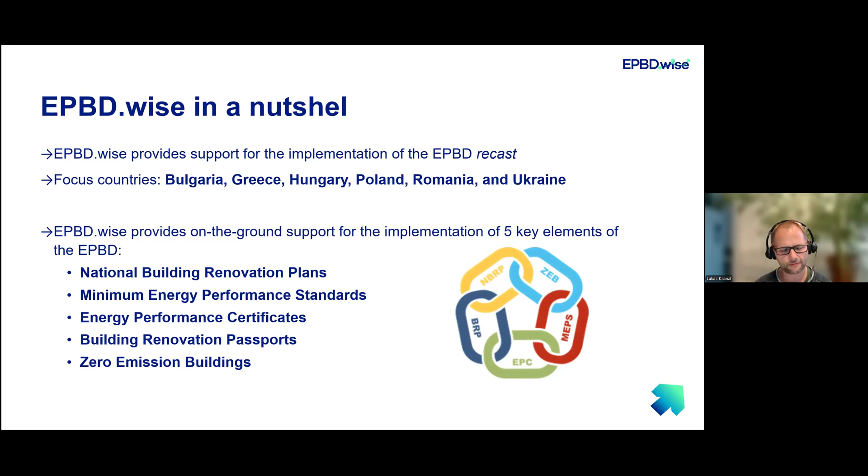And we deep dive into 5 key elements of the EPBD, which either were introduced as new elements in the revised EPBD or which changed their ambition level, their meaning, the way they interact with other policy elements. And these 5 elements are national building renovation plans, minimum energy performance standards and national trajectories for progressive renovation, energy performance certificates, building renovation passports, and zero-emission buildings.

And they are obviously all linked to each other. They cannot be really seen separately. And all of them are somehow covered and provided in a consistent way in the national building renovation plans. And this will be the main topic of my talk today.

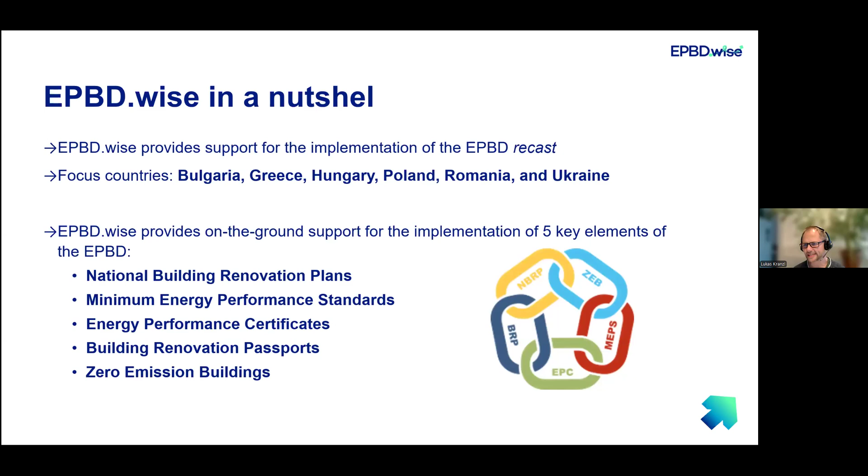Where do we stand with our project? We first worked on the question, what are really the policy needs? What are the challenges in selected European member states to implement these new innovative elements of the EPBD? And what are also best practices for each topic? And these reports can already be downloaded from our project website.

And we have now entered into the more intensive policy support phase, where we are working on drafting policy guidelines specifically for the focus countries, but in parallel also preparing the application of the results to EU 27. The project started in October 2023 and will last until June 2026. So we are approximately in the middle of the project now.

So now to the topic of national building renovation plans. According to the recast EPBD from earlier this year, national building renovation plans will need to include an overview of the national building stock for different types of buildings, a roadmap with targets for 2030, 40, and 50, including measurable progress indicators,

implemented and planned policies and measures supporting the implementation of these roadmaps, and outline also what are the needed investments, financing sources, and what are the measures to make this financing happen, and what are also administrative resources to implement the roadmaps, the national building renovation plans.

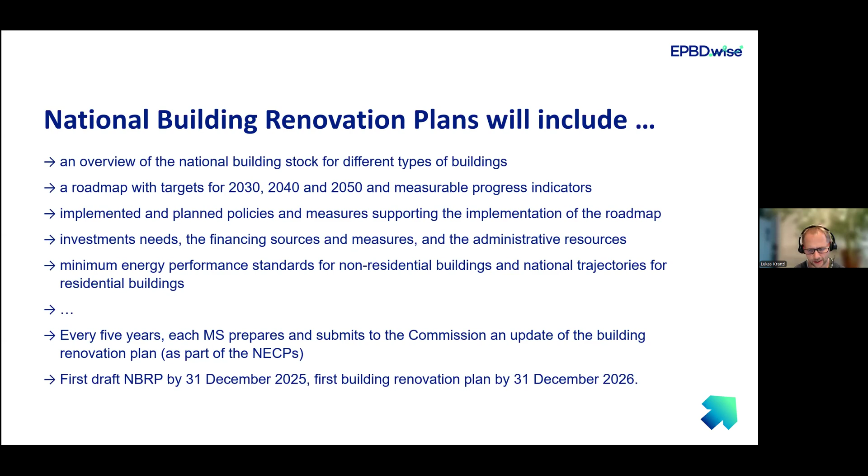National building renovation plans as a concept are new, but they strongly build also on the concept of LTRS, so long-term renovation strategies, which already have been in place before and were developed by member states before. And from these experiences, we can see there are already some good practice examples. For example, Finland provided a really very good roadmap, including measurable progress indicators. So these indicators are very tangible and can serve to monitor the progress very well.

Spain has very solid strategies to mitigate energy poverty. In Slovakia, there was a very convincing procedure of stakeholder involvement and public consultations. And Italy performed very well in building a profound, comprehensive building stock database. So it's not that we are starting from zero, but still there are quite some essential policy needs for setting

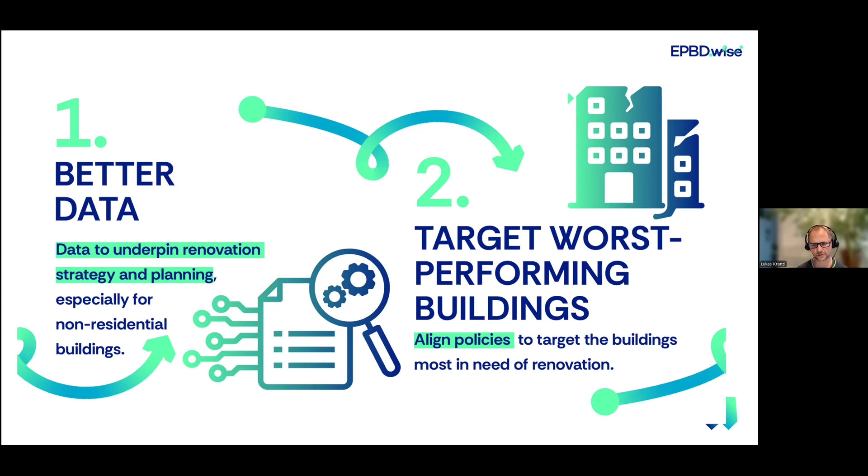But then we also need to establish the measures on the different sectors of the building stock, in particular for non-residential buildings, but also for residential buildings, public buildings. We need specific measures to tackle energy poverty, and all that through data-driven analysis. And last but not least, what I want to mention is the technical and economic feasibility, which needs to be, on the one hand, ensured by a solid modeling and analytical framework, but then also by a consultation with industry and citizens for feedback, as I said before.

So I already mentioned we have a strong focus on these 6 countries: Bulgaria, Greece, Hungary, Poland, Romania, and Ukraine. And we discussed with different types of stakeholders and experts in these countries, what do you think are really the challenges for developing NBRPs on member state level? And I don't want to go into detail. I just want to highlight that in more or less all the countries, the question of data on the building stock turned out to be essential.

So we need to improve building stock data, but then the question is also which information is actually needed, which granularity, for which purpose do we need the building stock data? And in the coming slides, I will try to highlight the elements which, at least from my perspective, will be key to set up this data requirement, this database for the further development of the NBRP. So the first key requirement is the information on the heated floor area and/or number of buildings per building type.

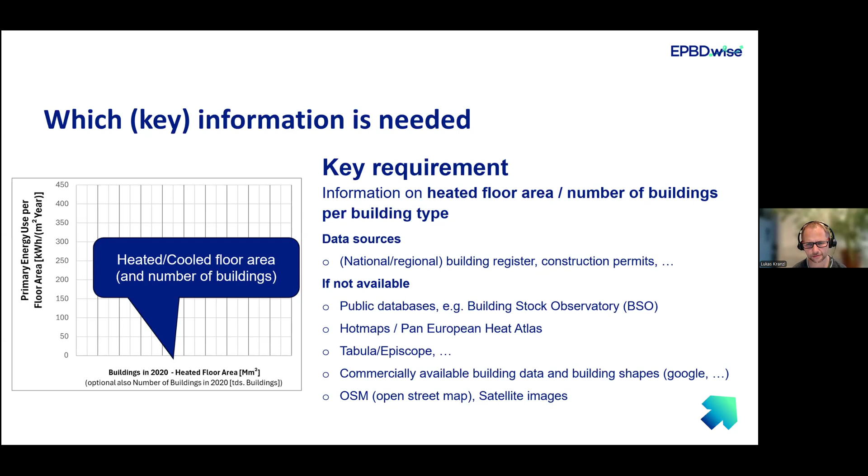Some of them are incomplete, but from our experiences, it's also necessary to combine different sources to use the strengths of each of these sources to come up with this key requirement of, as I said, heated floor area or number of buildings per building type.

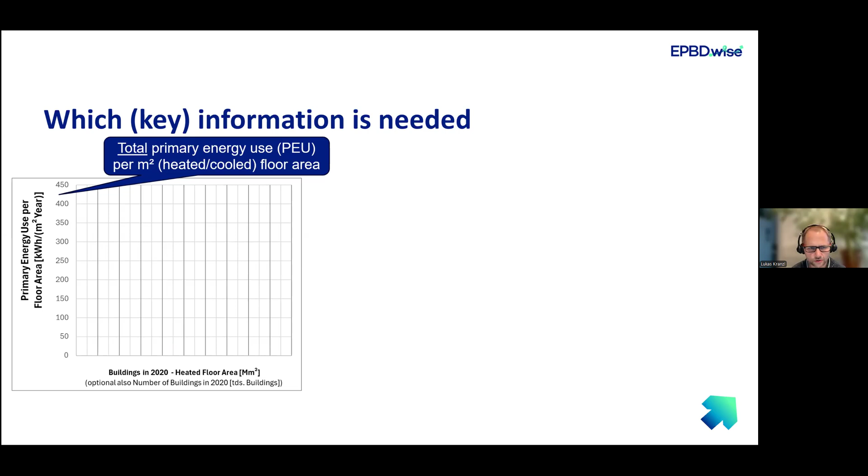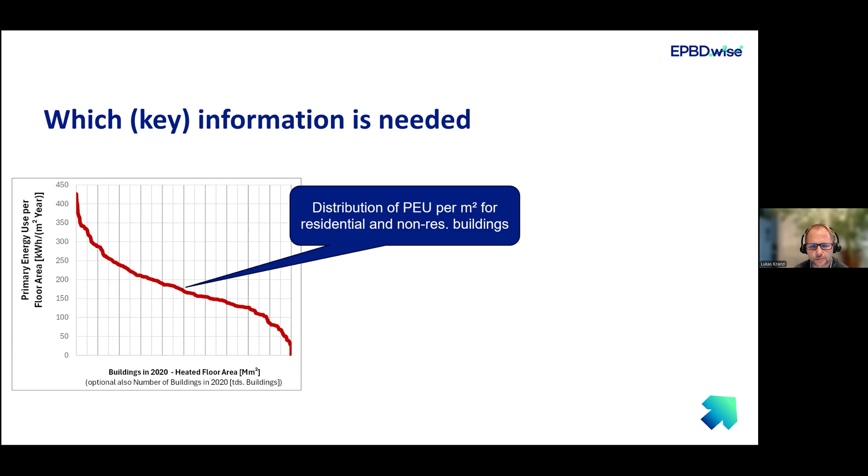Second key information which is needed is the total primary energy use per square meter of heated, cooled floor area. So if we have both of these aspects, so both the primary energy use and the heated, cooled floor area, conditioned floor area, we have the distribution curve of primary energy use per square meter for residential and non-residential buildings. Now, why is it important to have this distribution curve?

Article 9.2 asks member states to develop the trajectories for progressive building renovation for residential buildings, and at least 55% of the savings need to take place in the worst performing buildings, which are defined as the 43% of worst performing buildings in terms of their primary energy use. So we need this distribution curve, and then by deriving this intersection basically of this with this 43% line, we see, okay, which part of the building stock really needs to be focused on, because here the majority of the savings need to take place.

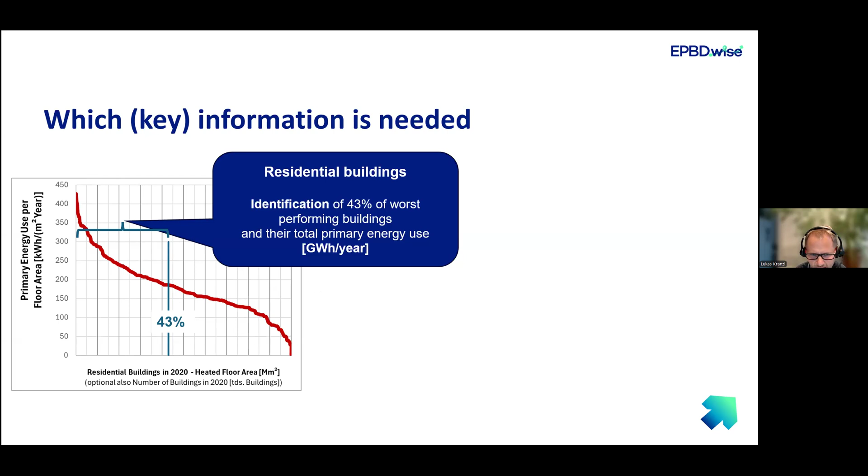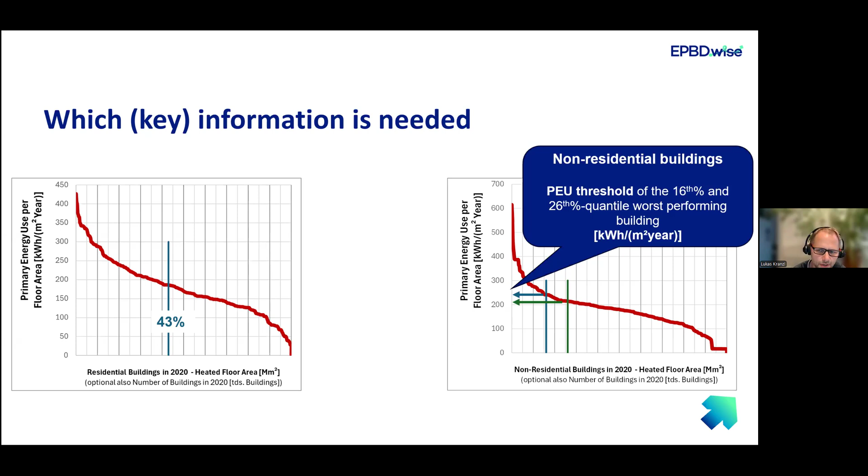Article 9.1 is on the minimum energy performance standards of non-residential buildings. And here again, we will need this distribution curve of the primary energy use to derive the threshold of the 16th and 26th quantile of worst performing buildings. So now we again derive this intersection of the curve with the 16th and 26th quantile line. And then from this intersection point, we go to the y-axis to derive the primary energy use threshold, which buildings need to achieve in the respective target year. So this shows why this primary energy use distribution is so important.

But so now, how to derive the primary energy use data needed? Basically, we need information on the heated floor area, number of buildings per building type. That's what I already said before, but also then by construction periods. So which vintage classes can we distinguish, and also by the refurbishment status. So what is the share of renovated buildings in different building classes? And this is, according to our knowledge, information which is often missing. So I think here there is a strong need also to improve the data set, and in the short term also to derive sound analytical methods and estimations.

And we need information on the heating system. If applicable, in particular for larger countries, climatic zones are relevant, to distinguish degree of urbanization, maybe availability of district heating, restrictions regarding renovation, for example, due to cultural heritage and so on. And then, of course, also primary energy factors by energy carrier are required to calculate the total primary energy use per floor area.

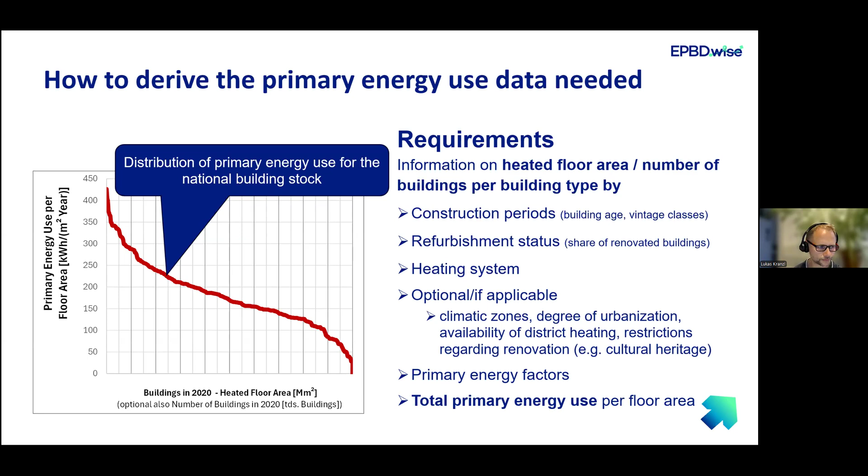So we can distinguish three approaches to derive the primary energy use data. First approach is archetype-based, what we also could call reference buildings. So archetype-based bottom-up modeled results. What does it mean? We describe the building stock in terms of different reference types, archetypes, describe them in terms of their geometries, U-values, installed technologies. And this, for example, can be done by making use of the data in the European Building Stock Observatory. Second approach are measured energy consumption data for a representative sample of buildings. And last but not least, third approach, EPCs, where again we need a representative sample for the whole building stock.

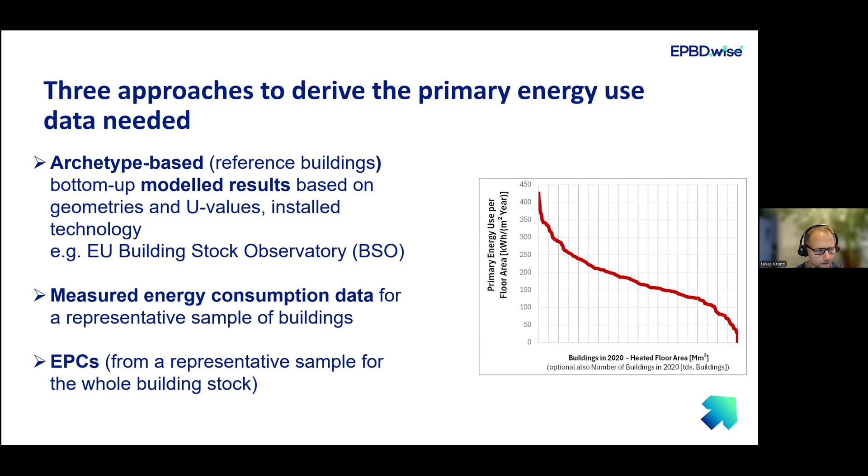So how could that work? Archetype-based bottom-up modeled results. Here we need data as they are, for example, collected already in the BSO, the Building Stock Observatory. The advantage here is that it's a data collection which is consistent in a common format for all member states. The data is maintained and collected through service contracts and summarizes a wide range of different data sources from statistical offices, reports, scientific analysis, previous projects, and so forth. But in general, it also needs to be enhanced by expert guesses. For example, the share of previously performed building renovation activities or the share of heating systems in different categories is often something that needs to be added because it's simply not available or not reliably available. And of course, always also consult other data sources such as Tabula, Episcope, and so forth.

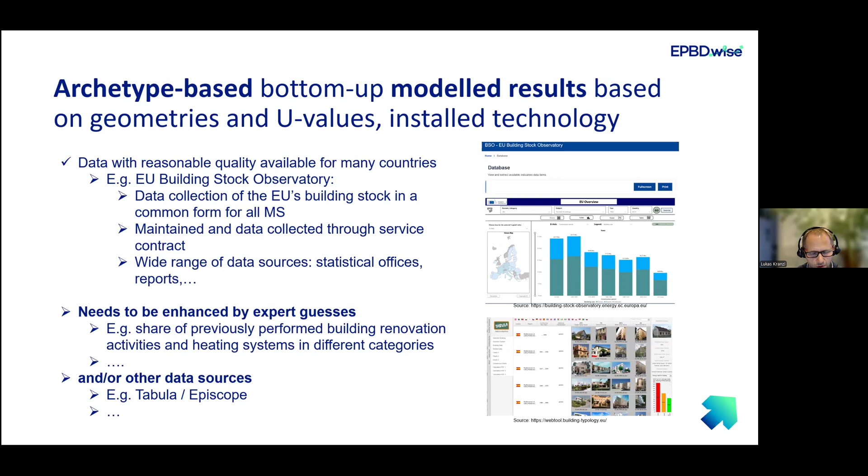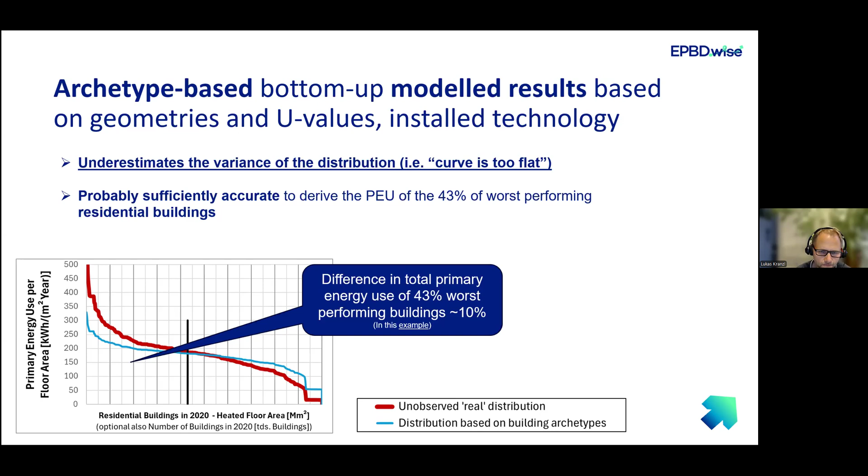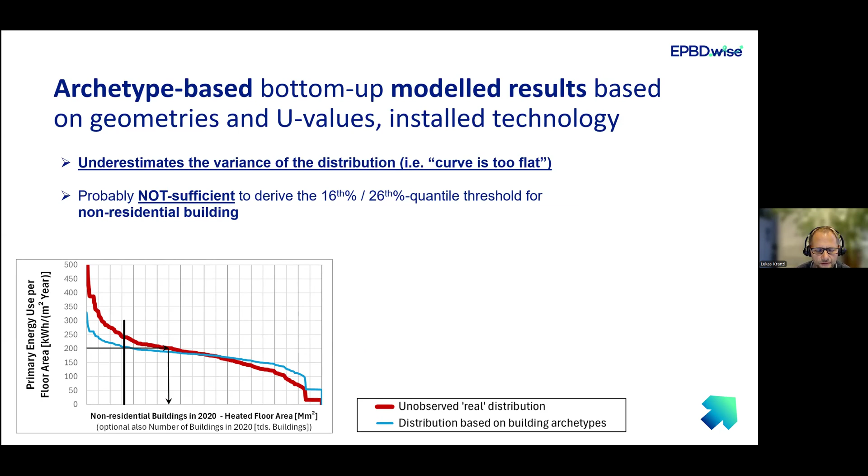But for deriving the 16th or 26th quantile threshold for non-residential buildings, it might be a problem to rely only on the archetype-based approach. Why? Because as we can see here, if we rely on the archetype-based approach, we might end up with a threshold which actually means that not 16%, but in fact 35% of the buildings need to be renovated by 2030.

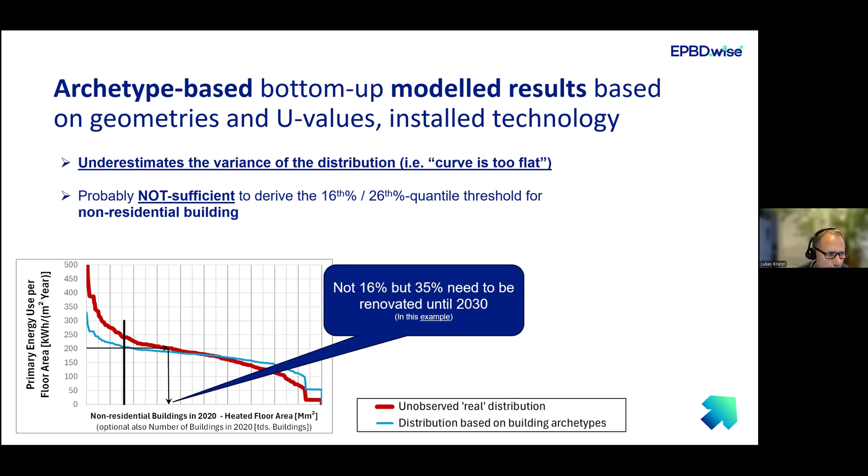So it's important to also enrich the archetype-based approach, for example, by measured energy consumption data for a representative sample of buildings. The good thing with measured energy consumption is that it's data that can incorporate the actual building usage and consider refurbishment status, climate, all these conditions. If there is a high share of gas or district heating in a region or a country, the data is also available in a focused way in a rather small number of utilities or ESCOs that could deliver this type of data. And then, of course, we need to convert that to total primary energy, but that's usually not the main challenge.

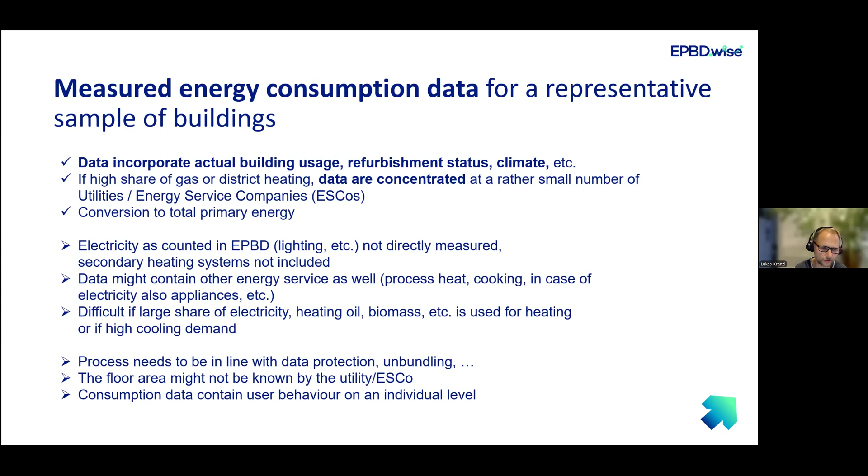But there are also some challenges. For example, electricity, as counted in the EPBD, is not directly measured typically. Also, secondary heating systems often are not included. Data might also contain other energy services, such as process heat, cooking, and so there are also difficulties and challenges with this approach. This also holds for respecting data protection constraints and rules. Also, often utilities and ESCOs do not know the floor area of the supplied buildings. They have a very good knowledge of the energy consumption, but not of the floor area. So also here there are challenges.

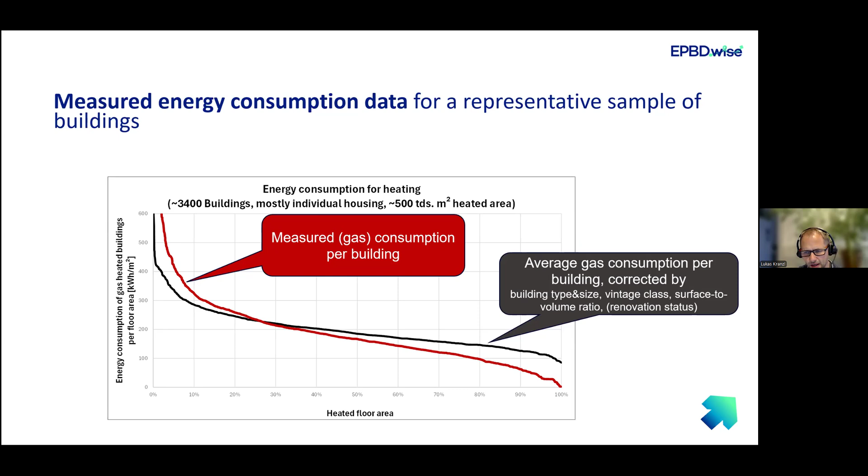And before we come to the third approach, again, here we can see in red the measured gas consumption per building, and in black the average gas consumption per building corrected by factors such as building type and size, vintage, class, surface to volume ratio. We did that in a European city for about 3,400 buildings. And again, we see a deviation of this real measured consumption to this average gas consumption per building after corrections. But the error might be acceptable.

And finally, we have the data that could be derived from EPCs. Again, as I said before, it's important to have a representative sample for the whole building stock. The good thing for using EPCs is it includes the required information, so floor area, heating system, energy use. It's based on a rather common methodology. In many countries, it's stored in one or a few databases, and in many countries, at least, it's accessible. At the same time, we also should be aware that this total sum of primary energy use, as reported by EPCs, most probably is not consistent with energy balances.

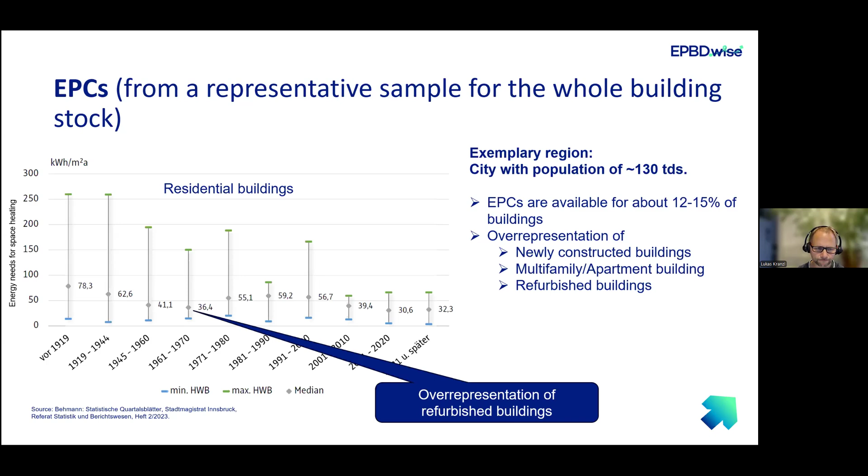Many countries, or I would even say most of the countries, do not have a representative, unbiased data sample. Typically, unrenovated, owner-occupied buildings are underrepresented, and we can see that here from an example within Austria, from a city of about 130,000 inhabitants. In this city, EPCs represent about 12 to 15% of the buildings. And looking, for example, at the case of the buildings constructed in the 1960s, we see that there is an over-representation of refurbished buildings. So in general, we tend to see in EPC databases an over-representation of newly constructed buildings, multifamily apartment buildings, and refurbished buildings, which also needs to be properly addressed and corrected for.

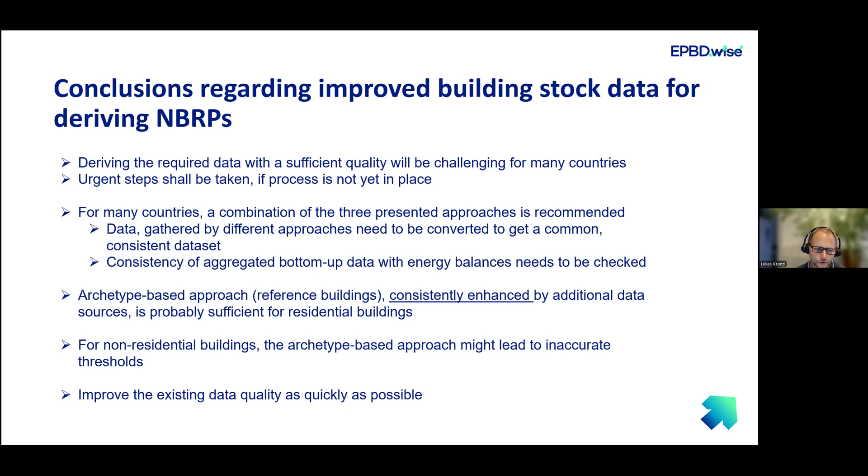So what are the conclusions regarding the need to improve building stock data? First, we need to derive required data with sufficient quality. It will be challenging for many countries. A combination of the three presented approaches, I think, will be required and also recommended. Archetype-based approaches might be sufficient for residential buildings, but for non-residential buildings, it might lead to inaccurate thresholds. There is definitely a need to improve the existing data quality as quickly as possible.

I focused in my presentation on the data on the current building stock and building activities and how to identify the worst performing buildings. As a next step, this needs to be embedded in an analytical model, derive policy scenarios, and go into the interaction with stakeholders to finally integrate all that in a consistent way in the NBRP template as will be provided soon by the European Commission.

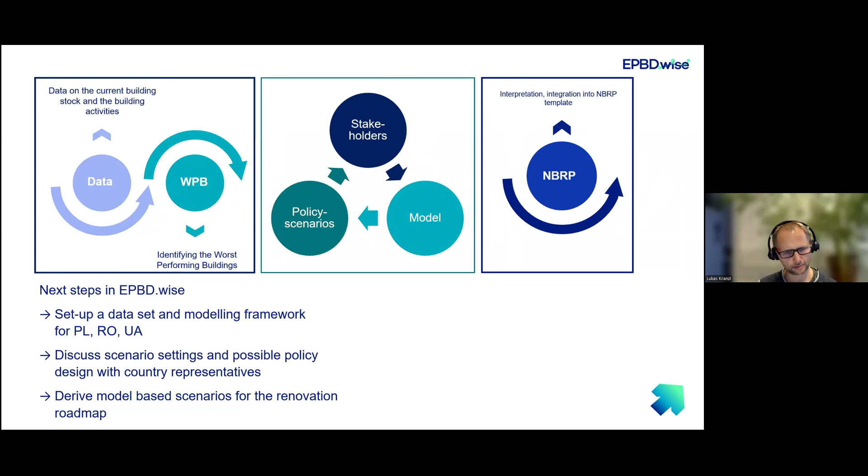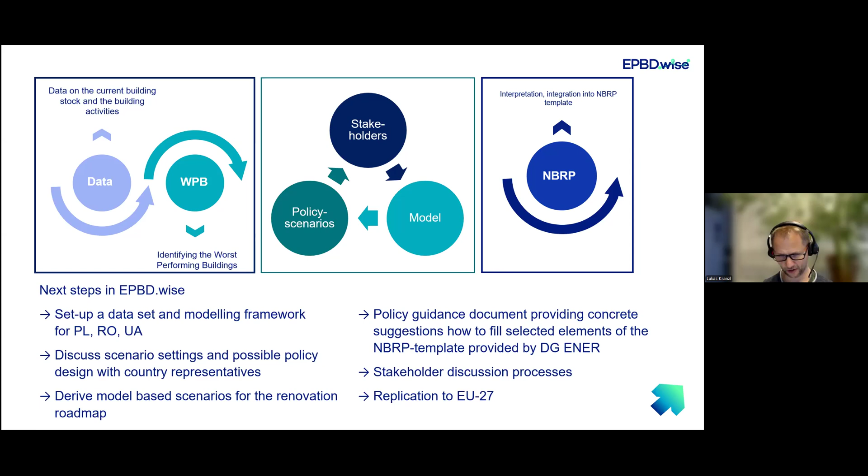As next steps in the EPBD.wise project, we will now work on the modeling framework for the three countries of Poland, Romania, Ukraine, discuss the scenario settings and possible policy design with country representatives, derive model-based scenarios for the renovation roadmap, and deliver a policy guidance document that should support the member states in filling the NBRP template provided by DG ENER. All that will be supported by a stakeholder discussion process in the first half of next year. And we are also working at the same time on how to replicate this process to EU 27.